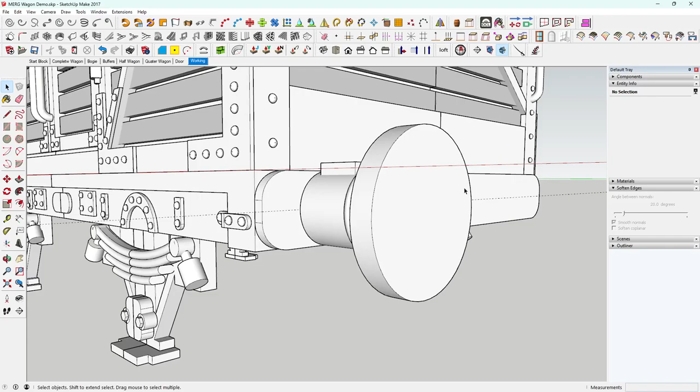So what we want to do now is find out how far it is across there. If we measure along the green to the centre of there, it's 2.37. So if we come off this edge and along the green at 2.37.

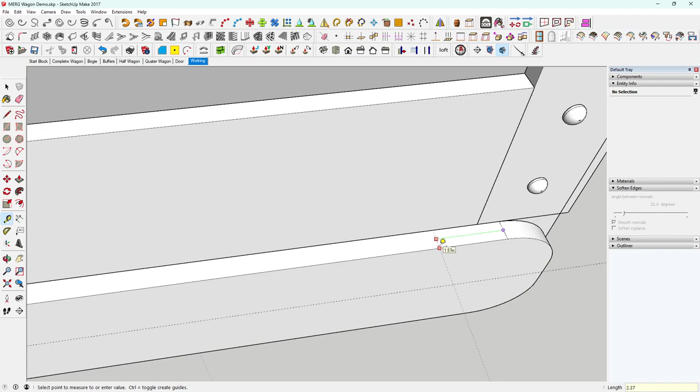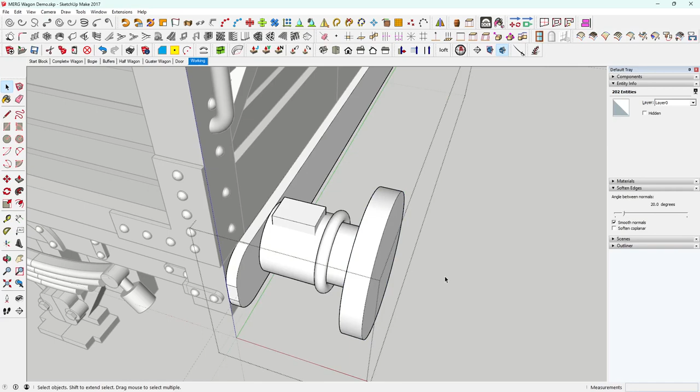What we can do is click on this, actually, yeah, so that's a group within a group, but anyway it doesn't really matter. We'll highlight, open a group, and then we should just be able to highlight the bits we want. That's there, and then we can find the centre of that block, do a control, green axis, and we should be able to reference off that guideline there. There we go, and that's kept it in the group.

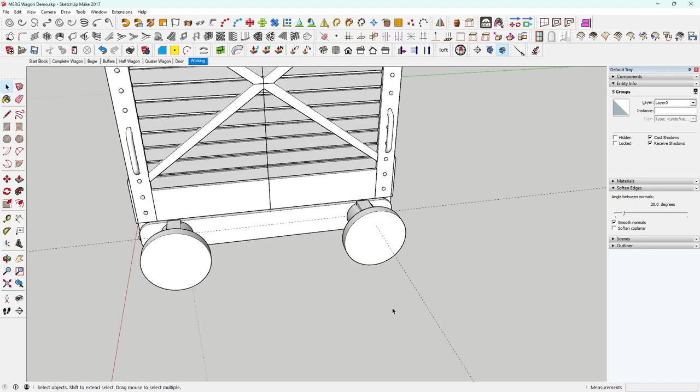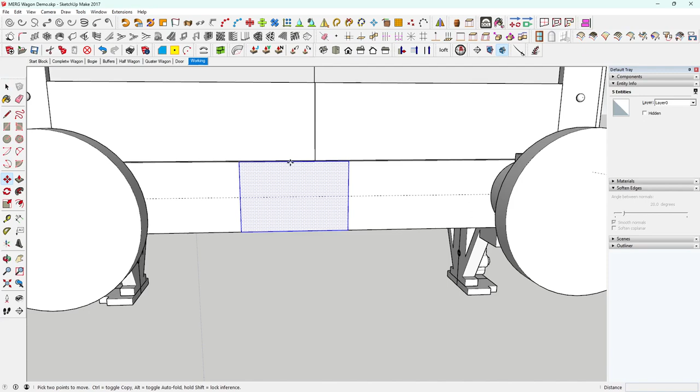And we want a hook in the middle, so we make another plate. We'll move that across into the middle. That looks all right, and we'll pull it out. I won't bother curving it, but you can curve it or whatever. Now you'll get into the techniques. This is just showing where to stick the hook.

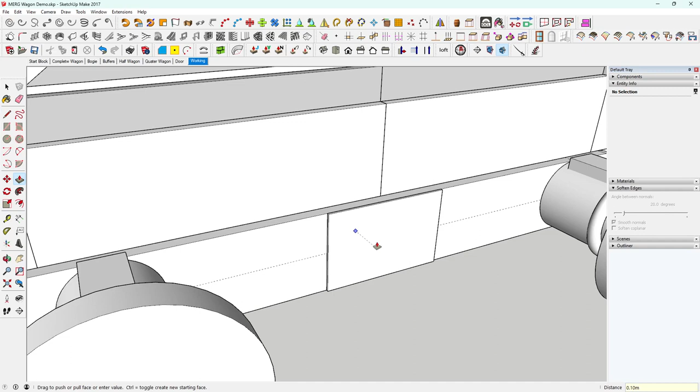So what we'll do is we'll pull it out to our 0.1. Oh, not 0.1, 0.6. And we'll triple click, right click, make that a group.

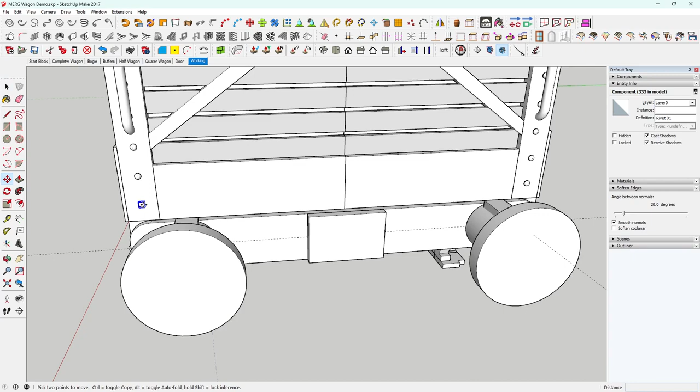We've got any rivets around? There we go, open this up. We'll copy that rivet, do an edit, paste in place, and then we'll move that over onto the plate here, and then we can move that forward.

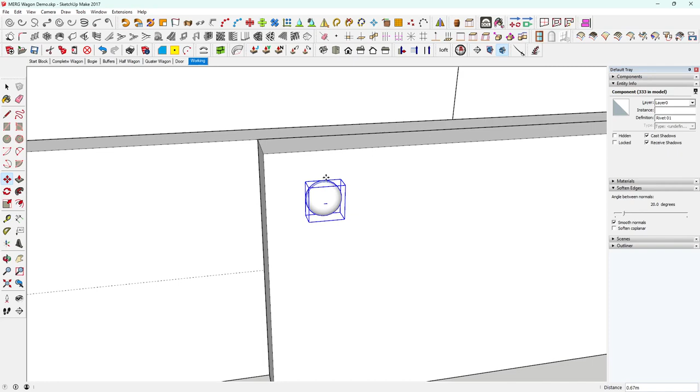So putting rivets in after, you can go mad, and you can put them in as many as you want, or as big as you want. So we'll move it across the green. Now this is a bigger plate, alright, and needs bigger rivets.

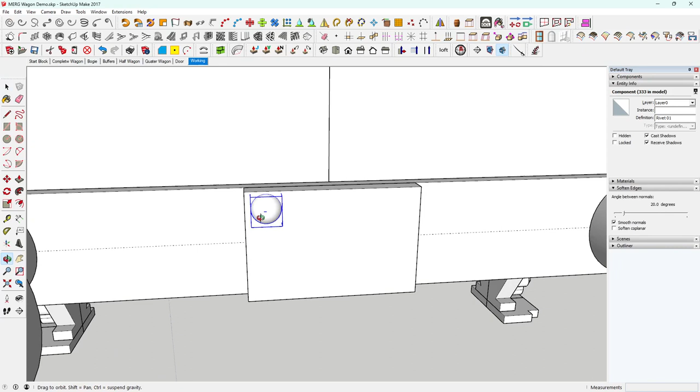So if we scale that, we get a corner, and press control, it will uniformly scale it. A bit bigger, isn't it? Bigger bolts to hold that on. Now you can always put bolts on there, it's whatever you want to do.

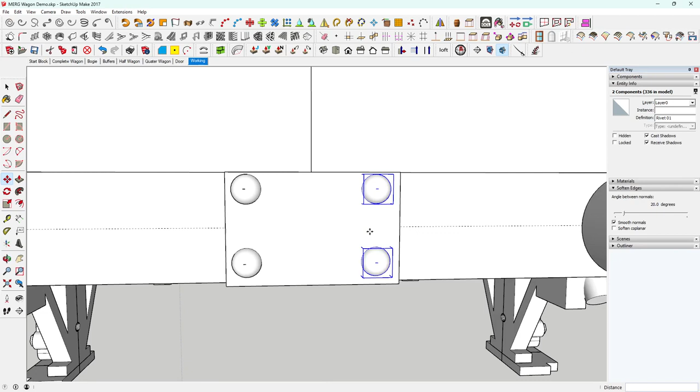So if we click on there, do control on the Z, down, there's a pick tool, pick them two, and then move them, control, and on green, there, and yeah, we'll call that quits. We'll pick all these and we'll cut them. We'll open up that group and we'll do file, edit, paste in place.

Right, now we need a hook. Now it is a lot of hassle making a hook, so an easy way to do it, which is a good way, we'll go online and we'll go to SketchUp 3D Warehouse. Now if you're using SketchUp Make, you can't import directly into the program, it's only available in the Pro version.

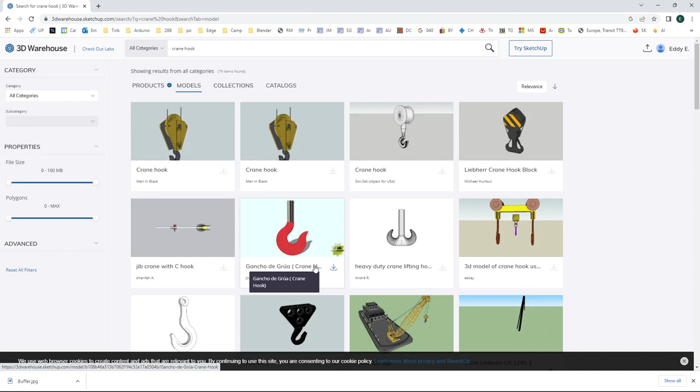So we go to the 3D Warehouse, we can still use this, we'll sign in, you have to sign in with a Trimble account, so that's all good. And let's have a look for a crane hook. That should bring something up. Now I've put in products, we want to click on models and a crane hook, and there we go. Now there's a few here, we'll go with this one. Can't pronounce it, but if you click on download.

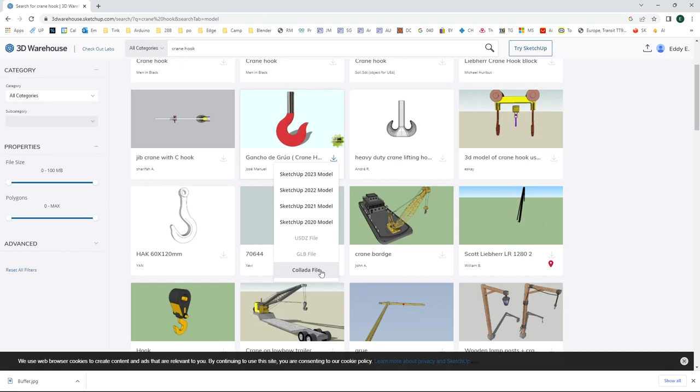It's only for the 20, 21, you know, all them models, but we can use a DAE or the Collada file, it's absolutely fine, so we'll click on that. Downloads it. You go to... no, wrong one, we don't want Super Slicer yet. We go to downloads and we'll find it and we'll unzip it.

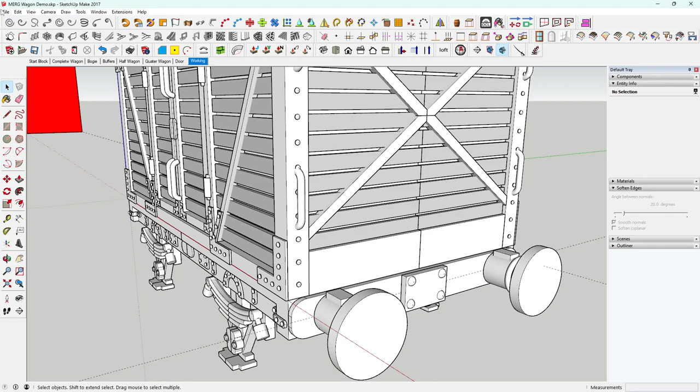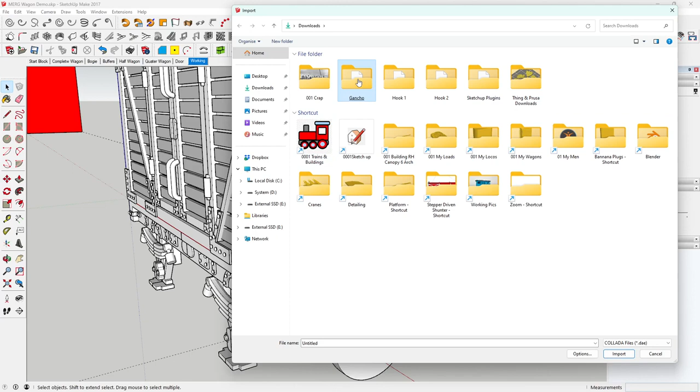And it's there. So now what we need to do in SketchUp, we'll go to File, Import, and then on the import we'll change that to CDA... Collada file, sorry, DAE, not CDA, DAE, Collada file. Yep, DAE, got that wrong. And we'll find the one we were going to, Gancho, and it's the DAE file, and we'll click on that. And here we are, and we've brought it in.

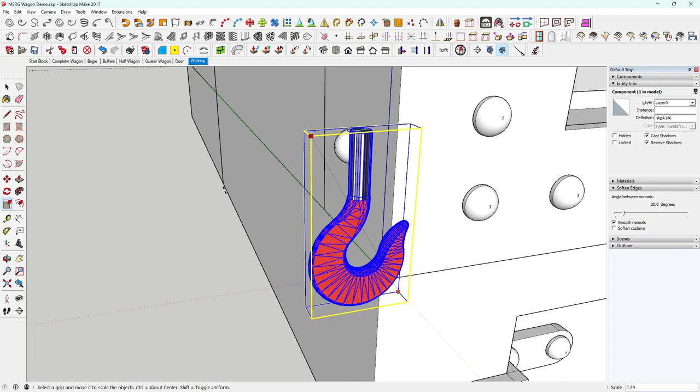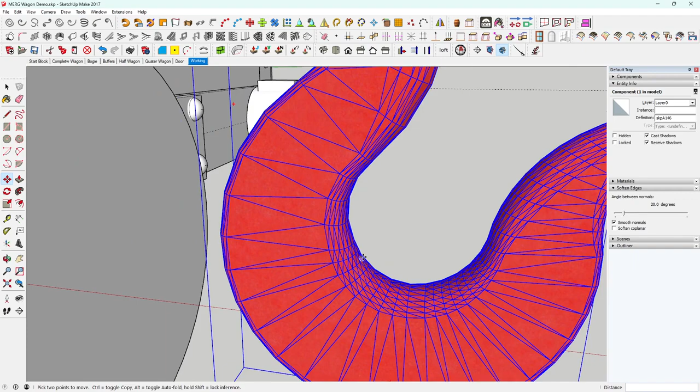Where are we in the model? Right, definitely need scaling, so click on our scale tool, scale it up. Wrong end, so we'll move it to the other end. And there we go, and we can rotate it.

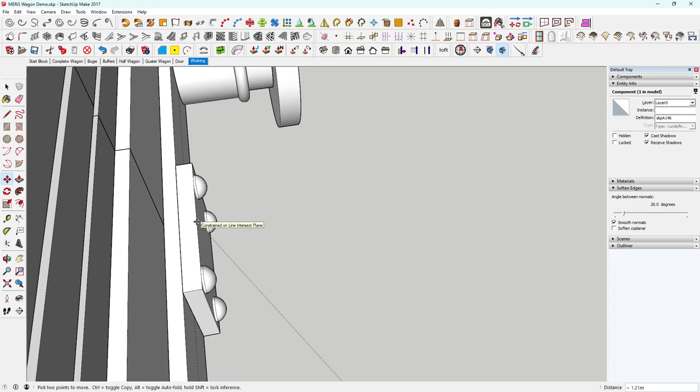And then we'll click on the top, we'll go on the up arrow and we'll find the middle of there. Hopefully. There we go. And then we can scale it to what we need. We do control, we uniform scale it. And then we can move that down.

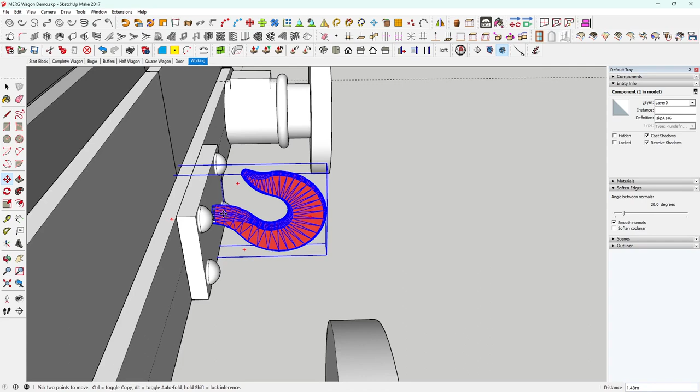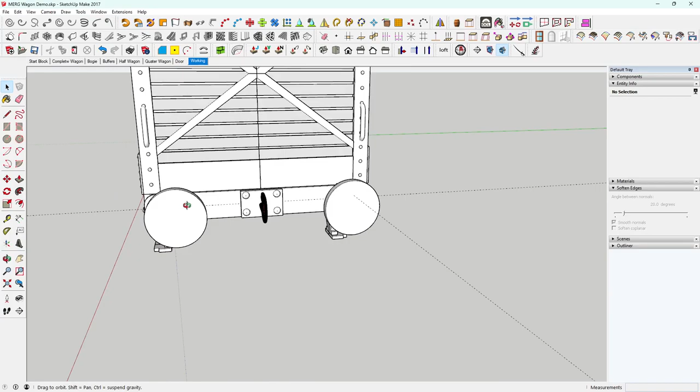And to there. Now, be warned, I would move it back along the red, so it's only just a hook, because when you come to print, this is one of the weakest parts of it, is this part, and that's probably a bit too big, needs scaling down, but we'll leave it as that. They break off, so do it too small and too flimsy, it'll break off. Do it a little bit chunky and you can actually use them. If you widened it a little bit, they'd be even stronger.

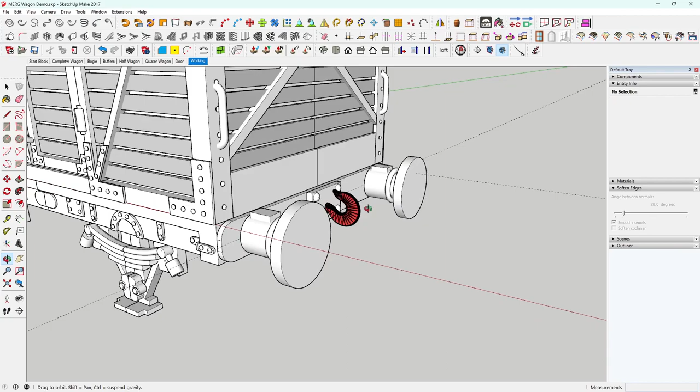So that's our hook and our buffers done. And what we can do is highlight all them, and we'll right click, we'll make that a group. And we'll right click and make that a component, and we'll call it buffer. We'll create it.

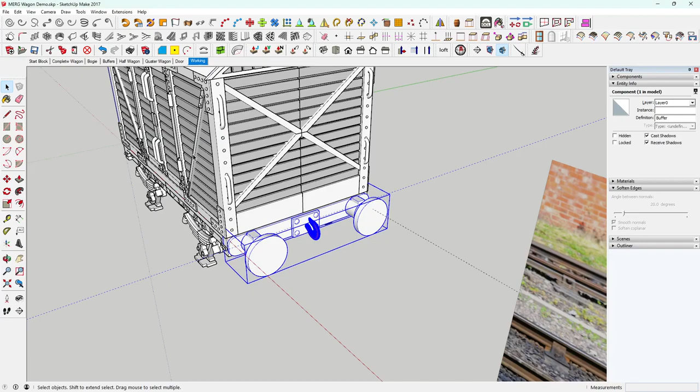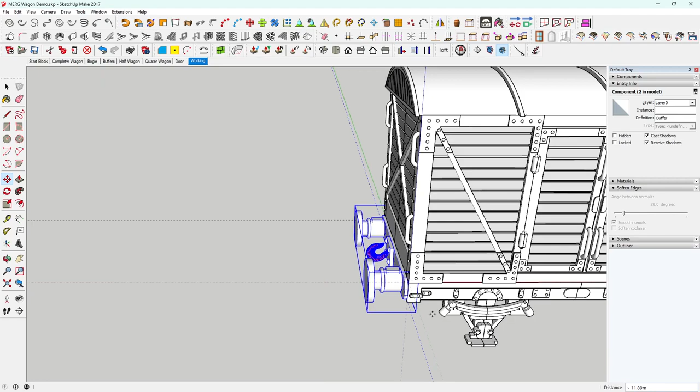And then we'll do what we've been doing, control, red axis, right click, flip along red, and then just walk it back on the red to the edge. And there we go, wagon with red buffers.